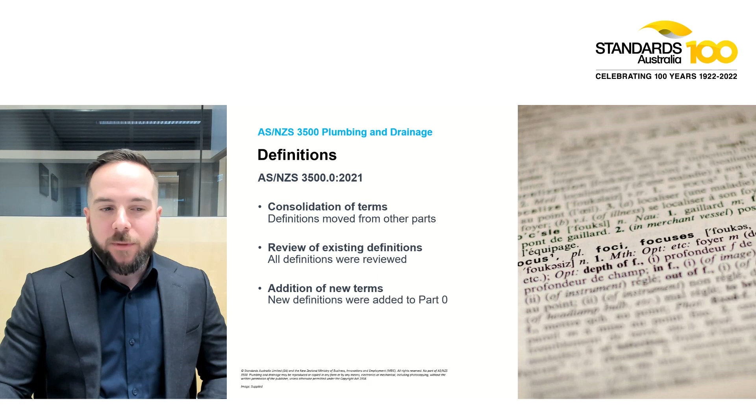On definitions, Standards Australia, in partnership with the Australian Building Codes Board, has produced an online dictionary of construction terms for the building and plumbing industry. This dictionary combines terms and definitions from the National Construction Code, 3500 Part 0, and Handbook 50, the Glossary of Building Terms. The online dictionary aims to assist industry, government, and consumers to understand the range of terminology used to describe the same or similar terms across Australia. And this dictionary can be accessed at constructiondictionary.com.au.

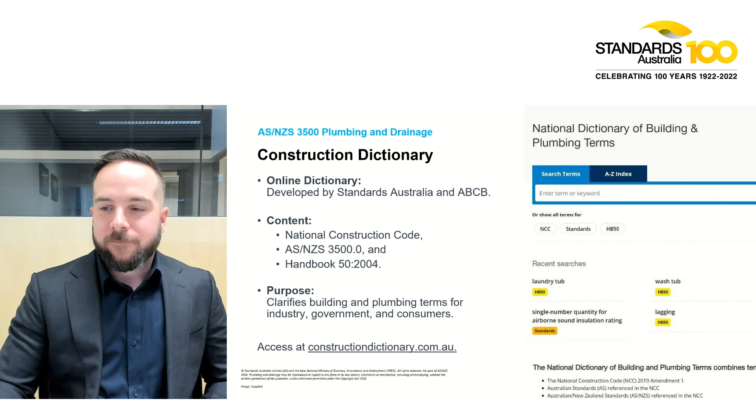So references to product standards for manufacturing, testing, and certification of plumbing products were common for 3500 Part 1, Part 2, and Part 4. However, there's a few issues with this. When 3500 calls up a secondary standard, such as a product specification, it locks in the edition of the product specification that was current at the time that 3500 was published. As 3500 runs on a 3-year amendment cycle in alignment with the National Construction Code, the documents called up cannot be changed for that 3-year period.

So this is an issue for standards for plumbing products that are regularly developed or amended and called up by the WaterMark Certification Scheme. These changes to standards are not tied to a 3-year amendment cycle like the National Construction Code, and this means that what's used for WaterMark and what's referenced in the standards can quickly become inconsistent. So in this revision, the references to product specifications have either been deleted from the clauses or relocated to an informative note to ensure alignment between the installation standards and the requirements for the WaterMark Certification Scheme.

On backflow prevention, in 2019, the Plumbing Code of Australia moved a number of public policy matters relating to backflow prevention from 3500 Part 1 into the Plumbing Code of Australia. So in the 2021 edition of Part 1, this duplicated content from the standard and the PCA was removed. So now all the information is contained in the Plumbing Code of Australia. The information that was contained in Appendix F, such as figures for the installation of backflow prevention devices, was relocated to Section 4, and now there's a single section in 3500 Part 1 for backflow prevention devices.

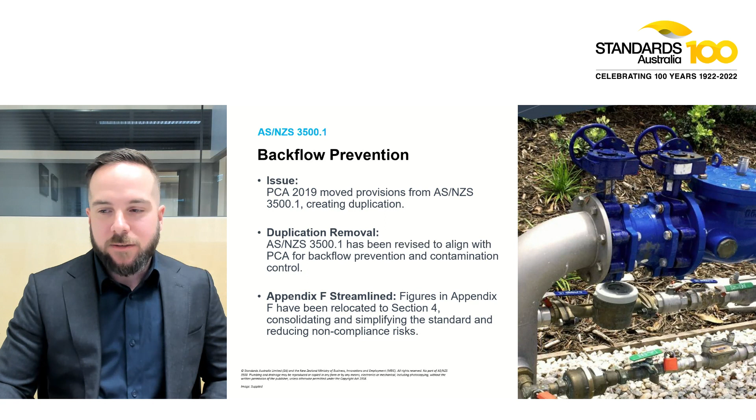The revision to AS/NZS 3500 Part 4 also sought to remove duplicated requirements for heated water temperature control. In the 2019 edition of the PCA, heated water temperature control provisions were elevated from Part 4 into the PCA, similar to backflow. Duplicated requirements between the Plumbing Code and Part 4 have now been removed. So if you're looking for the backflow prevention or heated water temperature control requirements, you'll find them in PCA 2022.

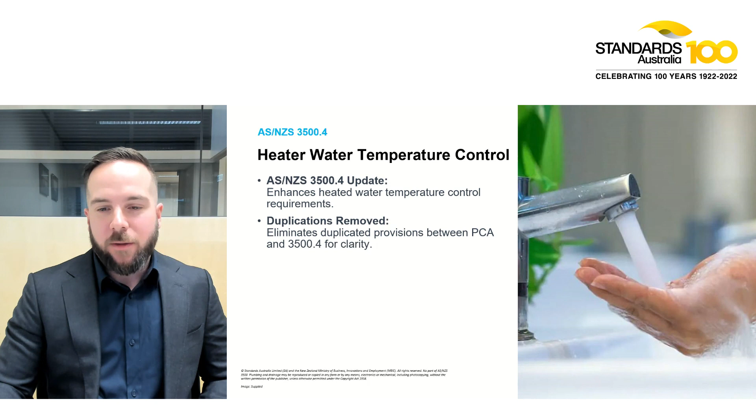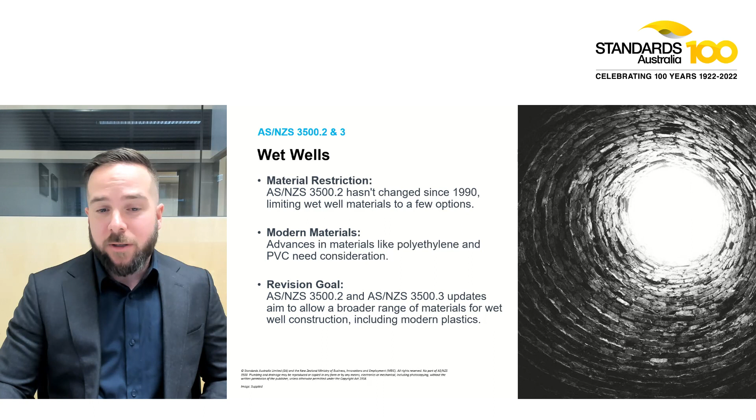On the wet wells, there was a range of allowable materials listed in 3500 Part 2 and Part 3 for prefabricated wet wells or the construction of wet wells. However, these materials have not been updated since 1990. Today, prefabricated wet wells are made from a variety of modern materials, including high-density polyethylene, polypropylene, and PVC, which were previously not recognised by the standard. The revision to Part 2 and Part 3 has increased the range of materials that can be used to construct wet wells and now captures all these modern material types.

Drains on unstable soils. Previously there were no provisions or guidance provided on how to install a sanitary drainage system on sites with unstable soil classifications. So in the 2021 edition of 3500 Part 2, guidance information has been included for the design and installation of flexible joints in sanitary drainage systems. The committee considered including deemed to satisfy provisions rather than guidance. However, the guidance was ultimately considered to be the best solution.

As there are a number of variables which need to be considered when building on unstable sites, a number of methods are available to minimise the damage to the pipework, and guidance was determined to be the best solution to ensure that the most appropriate solution is adopted for the site-specific conditions. The use of flexible joints is just one available solution that can be considered to address the issues of unstable soils. As this appendix is guidance and there are no deemed to satisfy provisions to comply with the Plumbing Code of Australia, a performance solution is still required for unstable soil classifications.

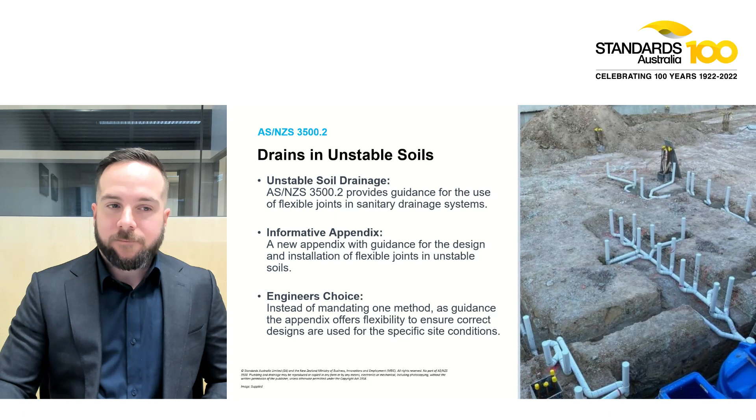For venting, the existing technical installation requirements contained in the 2019 edition of AS/NZS 3500 Part 2 did not reflect current industry knowledge and installation practices for both air admittance valves and pressure attenuating devices. This project amended the requirements for AAVs and pressure attenuators to ensure that the standard reflects common industry installation practices and provides improved levels of safe ventilation performance when using the AAVs and pressure attenuators. For AAVs, the change here was pretty minor. There were a lot of clarifications intended to reduce any chance of non-compliant installation through misinterpretation. For pressure attenuators, this was a bigger change and will enable more flexible and efficient application for the installation of these types of products.

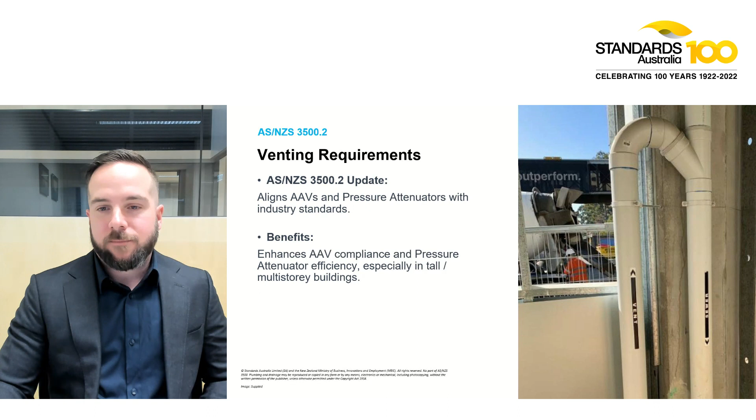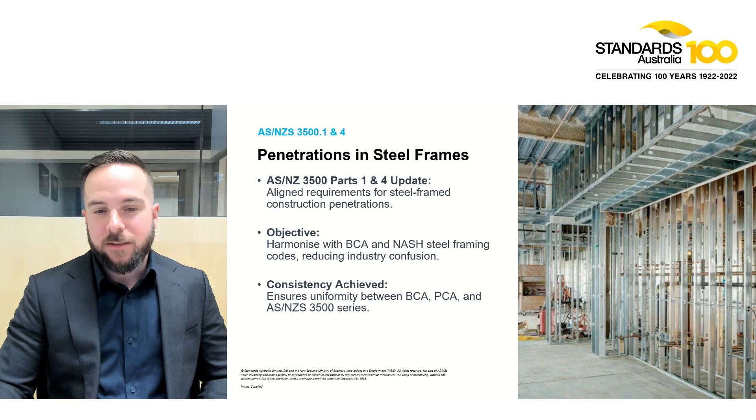Penetrations in steel frames. The requirements for penetrations in steel frames were inconsistent between AS/NZS 3500 Parts 1 and 4 and the Building Code of Australia. This was causing confusion in the industry, where there were two sets of different requirements that apply to a building. The key area of alignment related to the requirements for penetrations in metal framework, including the size, the number, and the placement of service penetrations. These revisions ensure that the requirements for penetrations in steel frame construction are consistent with the BCA and the National Association of Steel Framed Housing, or NASH, standards.

Jointing methods. There were inconsistencies in the provisions for jointing methods for plastic pipework in AS/NZS 3500 Part 1. There are 3 specific installation standards for the installation of plastic pipes: NZS 2033 for PE and NZS 2032 for PVC, and both of these standards were referenced in 2019. However, NZS 3690 for ABS was not referenced, even though the product specification was. The requirements for jointing plastic were reviewed, and the 2021 revision now directs plumbers to the relevant installation standards for the jointing of PE, PVC, and ABS. The standard also provides the appropriate jointing methods through these 3 installation standards as well.

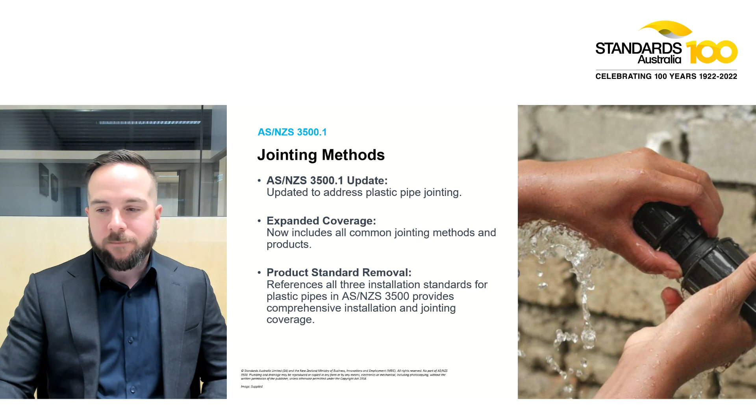Separation distances. So AS 3000, otherwise known as the wiring rules, states that wiring shall maintain a separation distance of not less than 25 millimeters between any above ground gas or water piping. This minimum separation distance is consistent with 3500 Part 1, but it wasn't with 3500 Part 4. So Part 4 specified a minimum separation distance of 100 millimeters between electrical services and heated water pipes.

So this is an obvious problem, and it arises when an electrician installs the wiring within 25 mil to 100 mil of a heated water pipe, generally after a plumber has completed the heated water service installation. So in that example, the electrical work would be compliant, however the plumbing would not. A review of the separation distances between the gas standards, the electrical standards, and the plumbing standards has resulted in a revision to 3500 Part 4, which aligns the separation distances between all the above ground services, and all the service installation standards are now consistent.

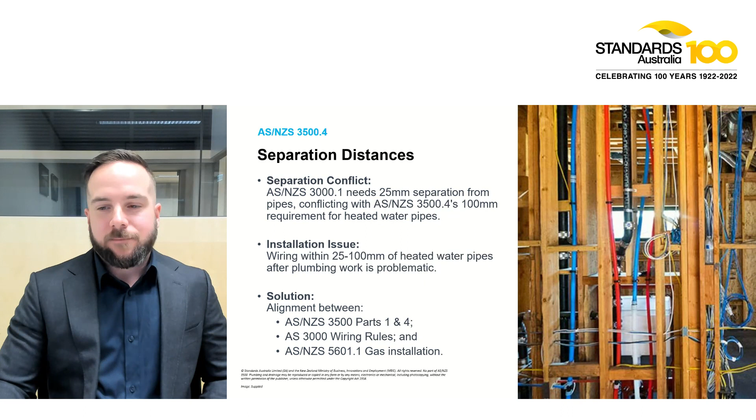Pipework marking. So another change for pipework relates to marking requirements. The revision for 3500 included requirements around the marking of pipes in commercial buildings. This was an outcome from public consultation, where it was identified that there would be merit in reviewing the marking requirements for commercial pipework. So the revision will ensure that the 3500 series provides clear and consistent requirements for pipework labelling in commercial buildings to ensure that the risk of pipework misidentification is minimised. And this really highlights the value of the feedback received through the public consultation period.

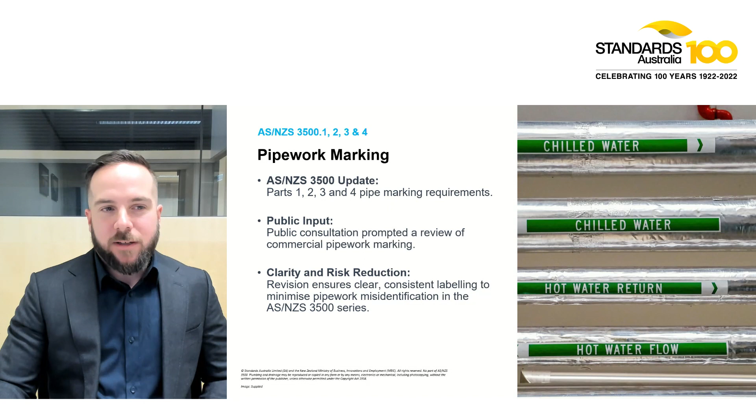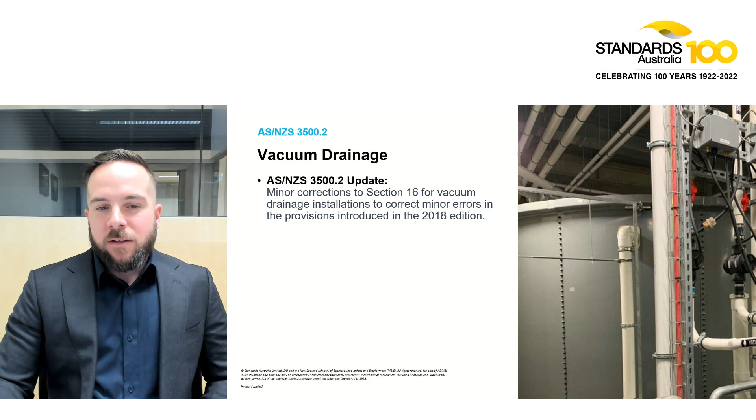Vacuum drainage. So AS/NZS 3500 Part 2 in Section 16 covers the design and installation provisions for vacuum drainage systems. This section was first introduced in the 2018 edition, and unfortunately there are several small errors included in the final text. As part of the 2021 revision of 3500 Part 2, minor amendments were undertaken to correct some of these errors. They're mostly simple editorials or involve clarification of some informative guidance text.

Dishwasher connections. So 3500 Part 2 was also amended to review the requirements for commercial dishwashers. The principal area of change here was the addition of alternative connection methods to the sanitary plumbing and drainage systems. Part 2 allowed commercial dishwashers to connect to a disconnector gully with a maximum 10-metre discharge pipe. This made the design of sanitary drainage systems difficult because other similar equipment, such as commercial kitchen sinks, were not constrained in the same way as commercial dishwashers.

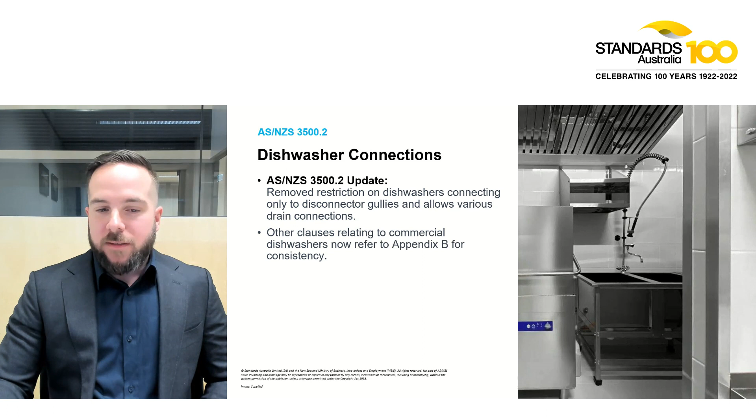So to resolve this, Appendix B was modified to allow dishwashers to connect to different drains, not just the disconnector gully, and now specifies the appropriate pipe size and length for each different type of connection. Other changes were made within the standard to reference Appendix B for consistency.

So rainfall intensity. AS/NZS 3500 Part 3 was reviewed to update the rainfall intensity data provided for both Australia and New Zealand. Rainfall intensity data is used by Part 3 to accurately design roof drainage and stormwater drainage systems. The data is continually updated by the relevant government agencies, such as the Australian Bureau of Meteorology. This amendment did not see a large change in the rainfall intensities, and in some areas there was no change at all. However, it is important to ensure that the data provided in 3500 Part 3 is up to date.

Another change in this area is the terminology used. The standard now refers to an annual exceedance probability, or AEP, which is the probability that a given rainfall total accumulated over a given duration will be exceeded in any one year. This removes the old terminology, average recurrence interval, or ARI, and confusion around the years specified by ARI, such as the 1 in 100 year event. So Part 3 now references an exceedance factor of 10% rather than a 10-year ARI, or 2% rather than a 50-year ARI.

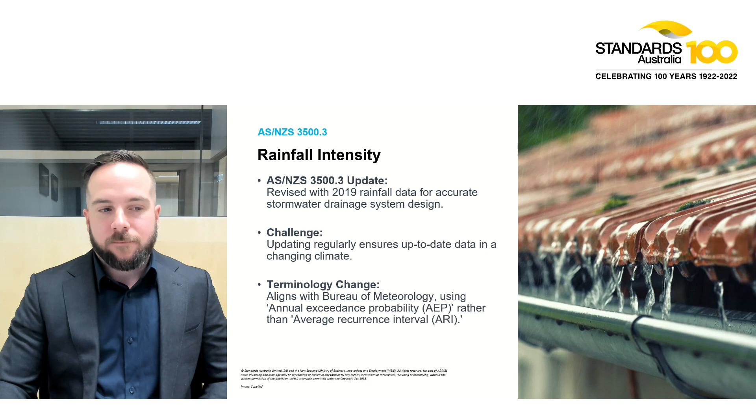Heated water circulatory systems. So unfortunately, in industry, it's become common practice for heated water meters to be located in a central area on each floor of a multi-unit building. This creates long runs of pipework from a circulatory system to the apartments and fixtures, resulting in unnecessary wastage of water and energy. So to address this, the revision to 3500 Part 4 included some additional requirements for heated water from centrally generated and circulatory heated water systems.

Primarily, the pipework is installed to individual dwellings and multi-unit developments. One of the key additions is the requirement for branch offtakes and water meter locations to be installed as close as practical to the individual dwelling that they serve. Also a recommendation for a maximum dead leg of 2 litres has been included. This consideration hopes to go a long way to reducing energy and water wastage. There's also a new appendix to help calculate the different volumetric requirements around that 2 litres and the different pipe sizes and types that might result in that.

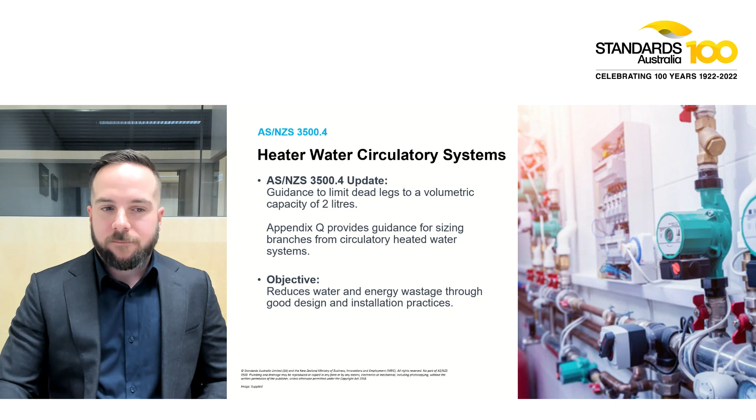Drains at grade. So part of the revision of 3500 Part 2 involved amending the requirements for drainage branches when installed at grade. A lot of research was undertaken on residential installations as waste stranding and sanitary blockages were regularly occurring. An existing building drainage system was replicated to allow observations around these issues, with the replicated installation being compliant with the Plumbing Code of Australia and 3500 Part 2.

This installation included a toilet which was installed upstream of 4 other fixtures connected to the drain using 45-degree junctions, all installed at grade. The test results of that research showed that the full flush discharge from the toilets and the performance of that drain line carry was negatively impacted by each of those junctions in the drain.

During the full flush discharge, the water was found to travel up each of the 4 branch lines at grade, significantly reducing the flush volume and the carrying capacity of the waste test media. So this is stranding the solids and the paper. Stranding was also observed within the 45-degree junctions and it was caused by a redirection of flow of the wastewater.

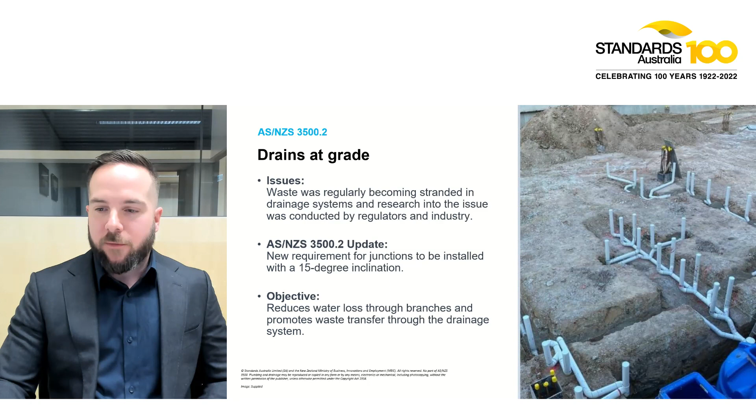So a number of alternative inclination angles were tested to find the best solution. Through the physical testing and observations, the 15-degree inclination was confirmed to provide the best performance of all alternatives tested. This angle is also common across international plumbing standards.

After this research was concluded, a proposal was submitted to Standards Australia and some amendments were made in the 2018 edition of 3500 Part 2. In the 2021 edition, the relevant clauses were also again updated to provide consistency and clarity. The image on the slide shows an inclination of the junction and how it helps to retain the flush water and maintain the waste carry in the direction of flow.

So these are 2 images of the main drain and branch drain connections. The image on the left has a connection at grade, whilst the image on the right shows a connection with a 15-degree incline.

There are some exemptions to the inclination clause. It relates to the repairs and extensions for existing installations where it might be difficult to achieve, where toilets are not connected upstream of the junction, where drain line carry isn't an issue, or where the main and branch drains are greater than 100 millimetres. The associated figures have also been updated to reflect this amendment and provide clarity and consistency across the clauses.

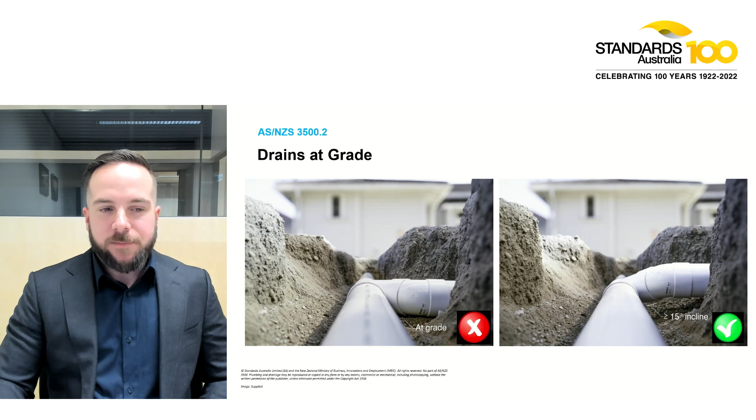Fire hydrants. Although this isn't a part of the 3500 series, another amendment that might be of interest is AS 2419 Part 1. This standard specifies the requirements for the design, installation, commissioning and testing of fire hydrant installations. This amendment ensures that the requirements relating to fire hydrant installations are contemporary and reflect present and future risks within the built environment. As well as acknowledging the benefits of sprinkler systems, it introduces a range of requirements for high-rise buildings based on international standards.

It limits the scope to buildings having an effective height of 135 metres, as well as some other limitations. Buildings over 135 metres present additional challenges to attending fire brigades, and there's implications on the design of on-site fire hydrants as a result of that. Appendix D contains information around buildings over 135 metres, but the Standards Committee wanted to defer developing prescriptive solutions until it's better understood how international standards may deal with these risks.

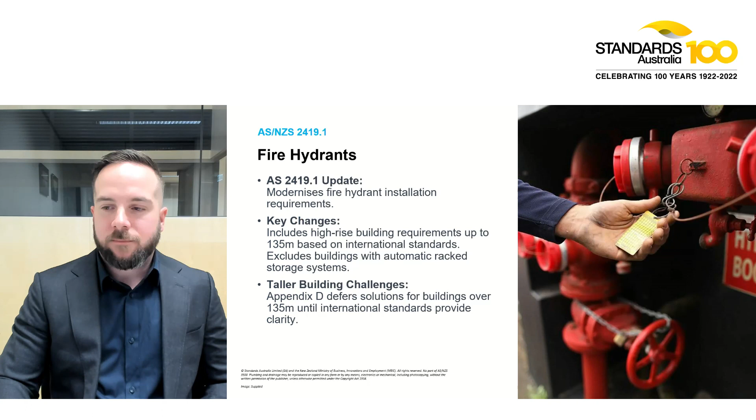Bushfire-prone areas. It's also important to note that AS 3959 has now been referenced by the 2022 edition of the Plumbing Code of Australia. AS 3959 contains requirements for construction of buildings in bushfire-prone areas. 3959 also contains requirements for plumbing services, which unfortunately plumbing practitioners were often not aware of, as it was never referenced within the Plumbing Code of Australia.

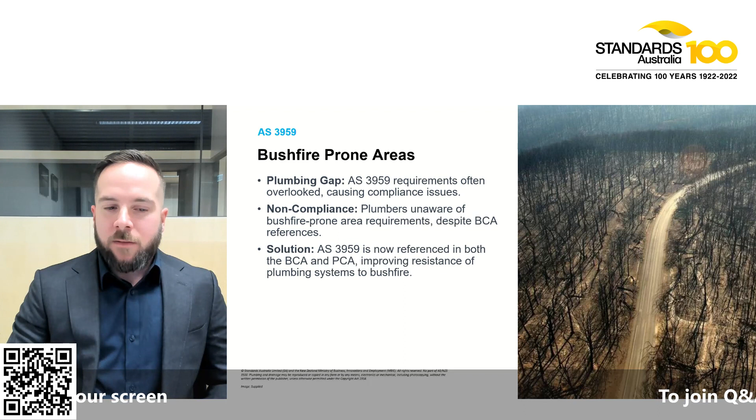This led to a lack of awareness of plumbing requirements, which were previously required under the Building Code of Australia via 3959. As construction is continuing to expand outside of the major capital cities and metropolitan areas, it's important that plumbers understand the requirements for plumbing service installations in bushfire-prone areas. The revision of the 3500 series has included references to the National Construction Code to alert readers to these specific requirements. This will ensure that plumbing systems installed in buildings in designated bushfire-prone areas do not create an increased risk to the building, such as providing an entry point for flame and embers.

So believe it or not, despite this presentation being on the standards that have only recently been adopted through the NCC 2022, Standards Australia and the WS14 Committee have already been busy developing the 2024 edition of the standard. So a 3-year amendment cycle for the 3500 series has been adopted to ensure the standard remains relevant and fit for purpose going forward, and future changes can be referenced in each continual edition of the National Construction Code. So to get an idea of what the committee's been working on, I'll present some general themes of the proposals that Standards Australia have received ahead of the next edition.

So some of the projects being worked on by WS14 and Standards Australia include some minor changes to the backflow prevention requirements around atmospheric vacuum breakers, new design and installation requirements for waterless urinals, with the goal to prevent struvite buildup in the sanitary drainage system, which is unfortunately becoming a common problem in industry. Also provisions for the installation of water-using appliances and requirements for wastewater discharge for any sort of miscellaneous appliances that the standard doesn't currently cover. Another project is provisions for sites where there's more than one building connected to a sanitary drainage system within a single property, so multi-building developments.

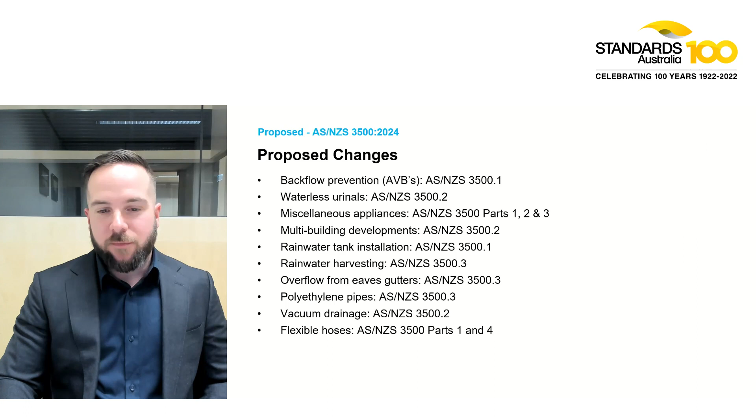So lots to get through, but I'll open up for some questions and hand back over to Henrietta. Awesome. Thank you so much, Tom. A lot going on there, lots of changes, and you've given us a really good comprehensive overview. So thank you. So yes, we do have some questions. We'll start with one from Brad. Was there any consideration for water meter location regarding unit metering for cold water also?

No, so the change to 3500 Part 4 was really focused on reducing water wastage from dead water, where there's a relatively long run from the circulatory heated water system to the point of discharge, and trying to minimise that where possible. It's very difficult for the standard to prescribe an exact location for those heated water meters or that pipe work, because there's a lot of site specifics to that. There wasn't any consideration around the cold water meter locations, but maybe that's a potential proposal for change in the future revision cycle.

Lovely, thanks, Tom. We've got a question for hot water. It was mentioned that meters are to be installed as close as practical to point of use or connection. Is this a normative or informative section of the code? So the requirement for water meters to be installed as close as practical to the point of use or connection is a mandatory clause. It is a bit vague because it's very difficult to determine what isn't a practical solution due to the varying site specifics of different buildings. But it does place that obligation on the installing practitioner to consider the length of pipe work and reduce it where possible.